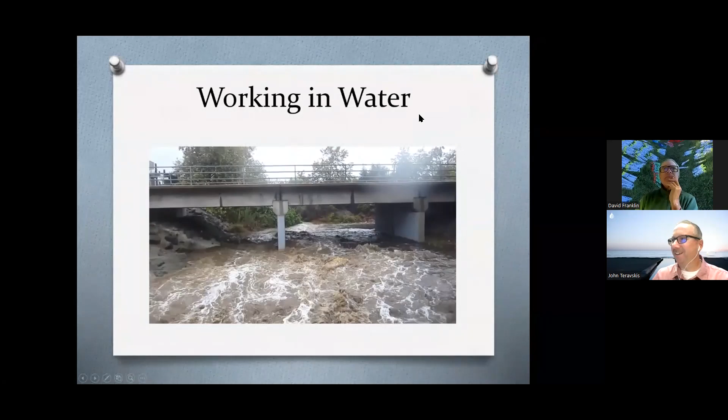All right, well, it's time to start, and I am really excited about this workshop, Working in Water. And I have my good friend, David Franklin, who I owe a lot of my professional background to. David was one of my original trainers, and I've enjoyed working with him and collaborating on all sorts of projects through the years and different trainings that we've done together.

So David is, I think, probably the most prolific trainer of record in the state. He trains a lot of people, very knowledgeable, and has quite an extensive background. So I want to give David as much time as possible. So David, why don't you tell us a little bit about yourself, your company, and then let's jump into it. Sure, John. Thanks for having me again this year.

Well, you know, mostly now I do training for the industrial and construction permit and other related classes, but I do try to keep my feet on the ground and help construction sites and industrial facilities. I'm a big proponent of learning from each other. Being a trainer of record means that we hear other people's information and expertise, and so then we get to turn around and share it with other people.

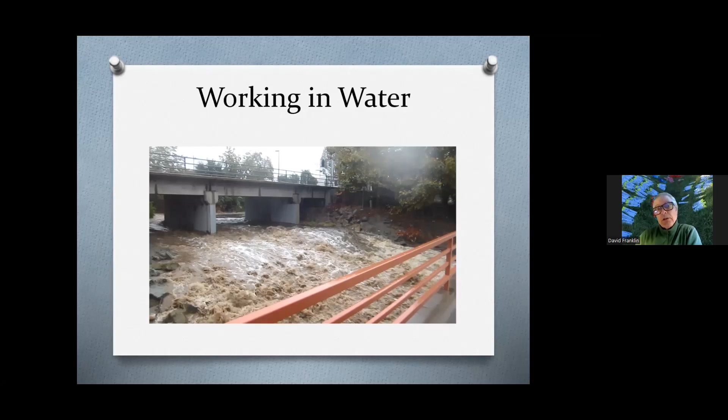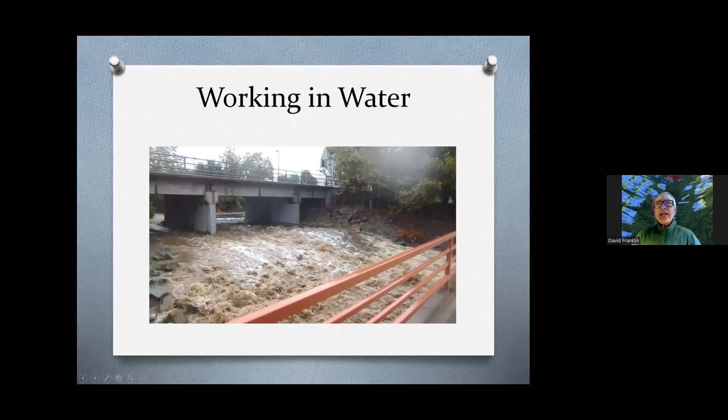So this little movie that I was showing a minute ago, I don't know if anybody noticed, but we had like tires floating away and straw bales. And so the question is, where did the straw bales come from, right? Well, earlier that day, the straw bales and the plastic sheeting and the gravel bags were in the channel, along with some equipment. And there's a different movie I have that shows the oil pan from underneath that excavator floating away. So why does this kind of problem happen where straw bales are washing away?

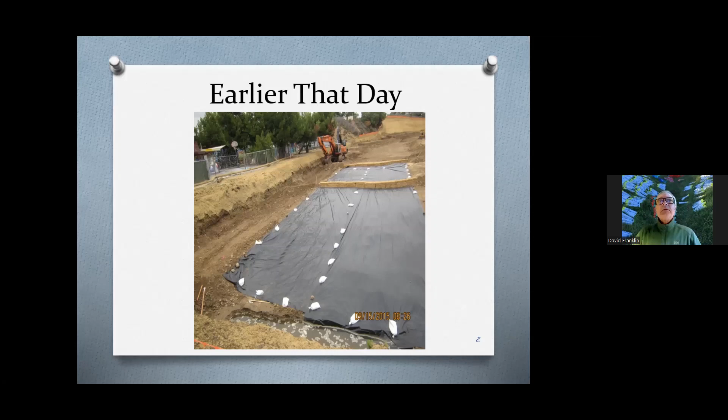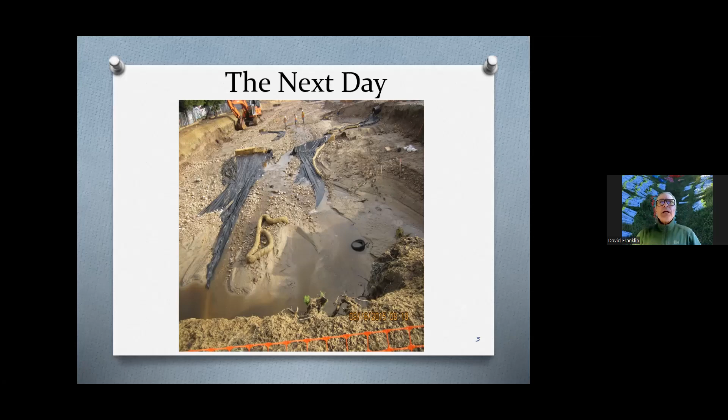It was actually in the stormwater plan to have straw bales and plastic sheeting and gravel bags as a temporary solution in the stream. And I like to ask the question, what is the first BMP in the book? The first BMP is scheduling, planning, not being in the water body at the wrong time. And yet there are different forces that make this happen time and time again, right? So, that was later in the day or the next day, everything washed away. But what contributed to that happening?

Planning and design. We mentioned that the first BMP in the book is planning. And so the civil engineers pretty much have it dialed in for the final condition, don't they? They know how to build it so it doesn't wash away. And so one of the first ideas I like to share is that the temporary mimics the permanent. That means that if we're looking for a temporary sediment control, it should mimic the permanent sediment control a lot of times. We'll explore that idea a little bit more up ahead.

And there are various permits required to be in the stream, right? Well, in this job, anytime we work in or impact directly the water body, we're supposed to get permission from the regional board through the 401 certification process. And when the applicant fills out the 401 application, the regional board has the ability to comment, or it might time out. I think it's 30 days. And if the regional board has not commented, well, then the operator can proceed.

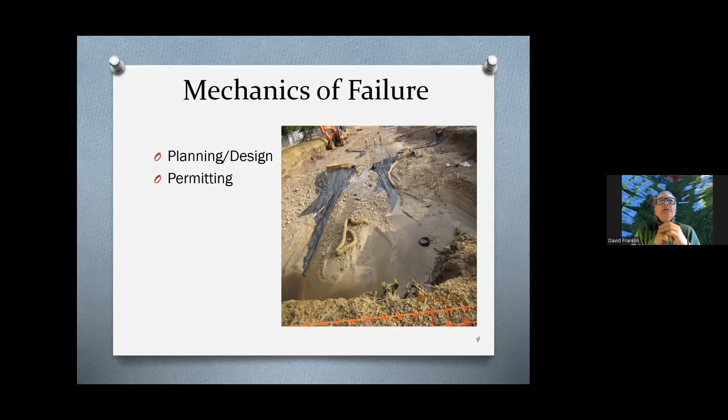So in this project, no comment was given back to the operator. And so that's part of the failure. We need to have limitations from the regulators issuing the permits.

Now, sometimes the contract will say contractor must proceed within 60 days or 30 days of award. So now that's a problem, because maybe it's not the ideal time for the environment. And suddenly we are desiring to make an impact on the stream bank when it's not ideal. The rains are coming. So there's a conflict there.

Funding. On this job, the accessibility to the grant funds was running out. Only so many months ahead could the contractor get those funds. So now we're chasing the funds instead of protecting the environment. So that's another conflict.

And the SWPPP, the BMPs, it's hard to know what kind of temporary solution could deal with the river coming from the rains. And so this is what they had in the SWPPP, and so the contractor did it, but it wasn't the right solution, right? It's hard to know what a legitimate solution is.

And at the end of the presentation, I have a little discussion on, other than not being in there at the wrong time, what might be something you could do before the job is finished. Because that's what we as SWPPP managers must always keep our eye on. How do we survive before the finished condition? That's our question.

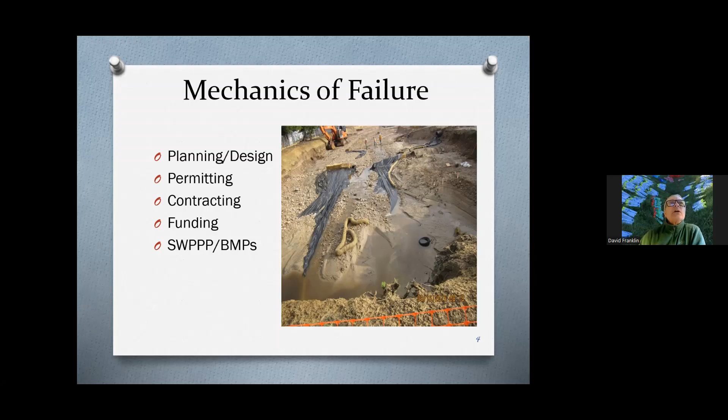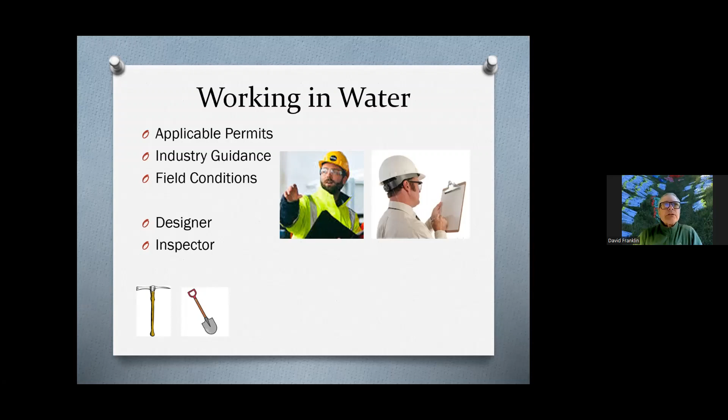So applicable permits, we've got industry guidance, and we've got the reality of our empirical assessment of the site conditions. So maybe there's input from the designer, the inspector, or the enforcer. And of course, there's no better enforcer than Dirty Harry.

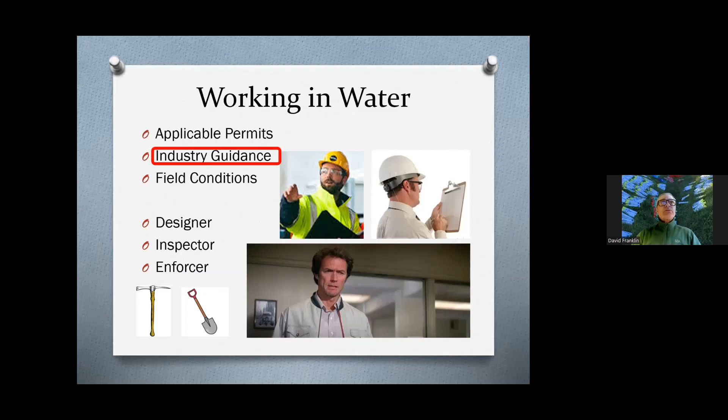Let's look at some industry guidance. So the categories of BMPs, I always like to point out that in our industry, we have a bad habit of going to the toolbox and pulling out a crescent wrench to paint the kitchen, because we're not isolating the different categories of BMPs, like planning and scheduling is the first one, and

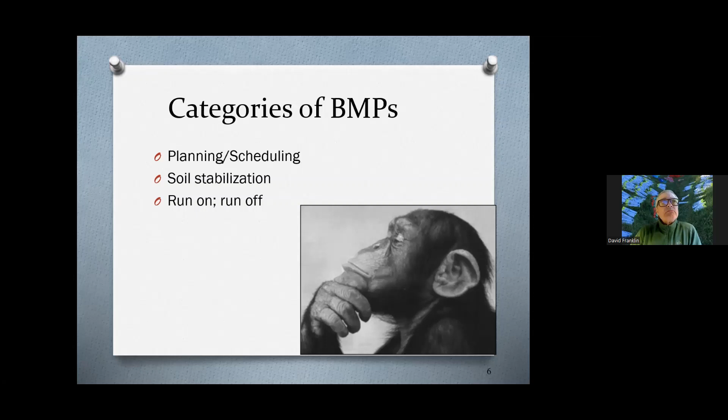soil stabilization, concentrated flow, run-on, runoff, sediment control, housekeeping, and non-storm water. So in our construction permit, more or less, those are the main categories. But what's missing? All thinking chimps want to know what's missing. And there's a component called working in water. And where would we ever find that component, that BMP? There's a hidden little secret.

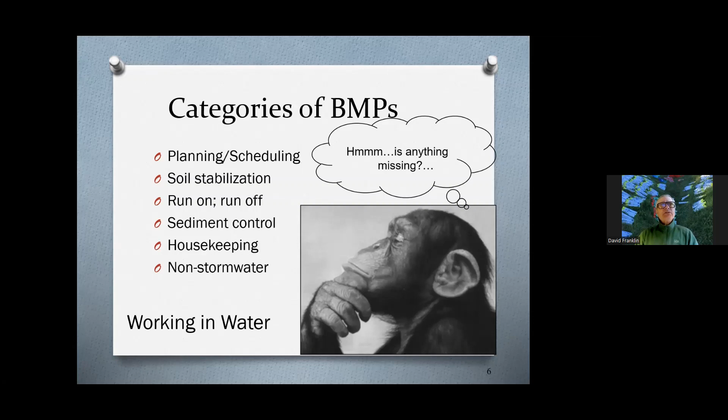So we have these BMP manuals. This is one from the olden days. Everybody see how that's from the olden days? I don't see that one floating around anymore. But this is the Caltrans table of contents for the temporary soil stabilization, which sometimes we call erosion control, sometimes we call raindrop protection. Protection from the raindrops is SS-3 through SS-8.

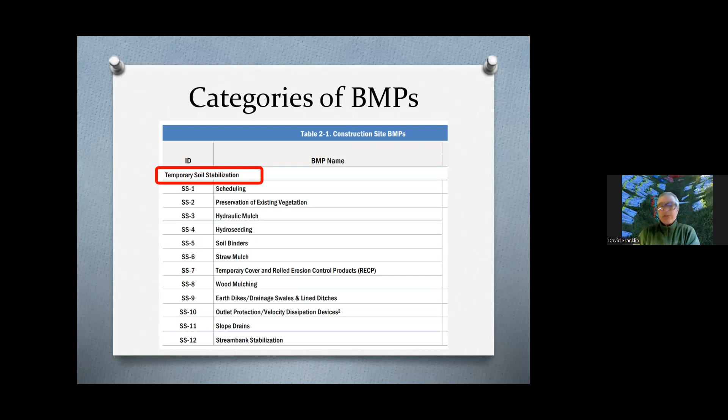And then SS-9, 10, and 11, those are for the concentrated flow condition, right? We want to divert water, convey water, release water in a concentrated form. That's 9, 10, and 11. But here's the little secret, everybody. You know what SS-12 is about? It's how to do the first 11 when you're in the water body. That's the hidden BMP. How to do the first 11 when you are working in or near the water.

And time after time, we will see jobs that are in or near the water, and they don't pick stream bank stabilization, which is guidance on how to be there. That's kind of odd, isn't it? That's where we get good information.

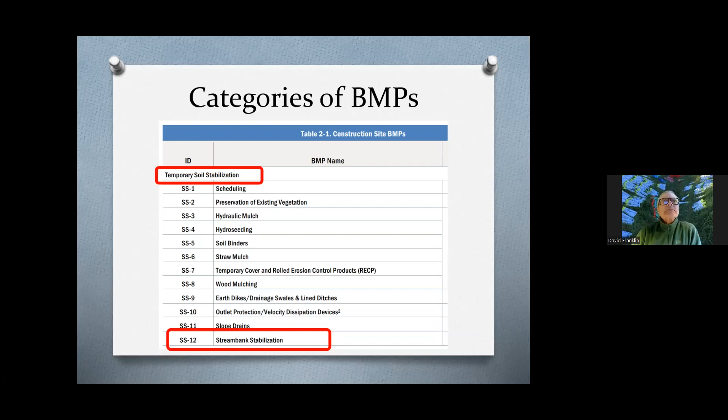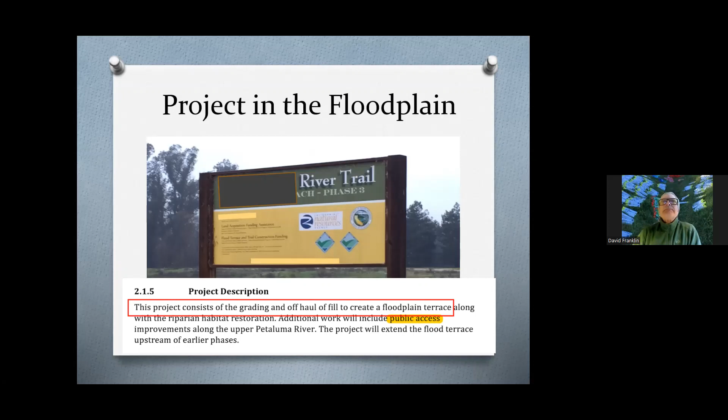So this project here, the scope of work was hauling off illegally dumped dirt to create floodplain capacity. The floodplain terrace needed capacity. And the other part of the work was to make a public access trail. Okay. So the final design called for fiber rolls in the floodplain.

And I am concerned that over the years, we've become obsessed with fiber rolls, linear barriers of any kind, but largely fiber rolls because they're lightweight, inexpensive, and we can throw them everywhere. I like a fiber roll as much as the next erosion control junkie, but they don't apply everywhere.

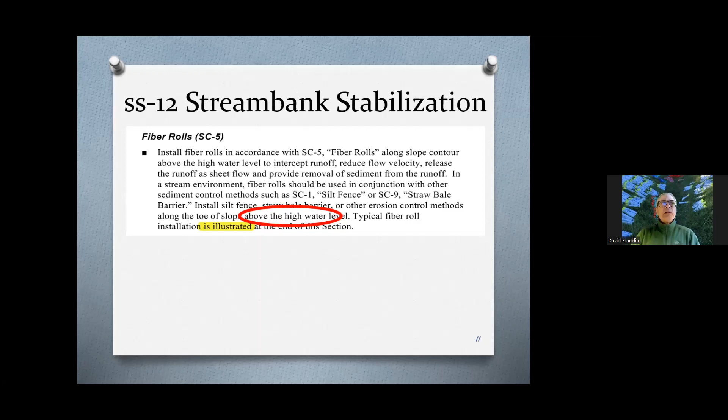And you know, the book that nobody reads, that BMP manual that nobody reads, what does it say? It says, put fiber rolls above the high water level, not in the water. It says, don't put them in the flow, the concentrated flow. And what is the high water level? Well, it says here, often corresponds to the edge of the stream side terrace. So put them above the floodplain terrace, not in the floodplain.

And remember, when we look at the BMP manual, it's good industry guidance. We might disagree and ignore, for good cause, certain things. And we might also be much more strict than the general industry guidance. We can go either way based on our professional experience, judgment.

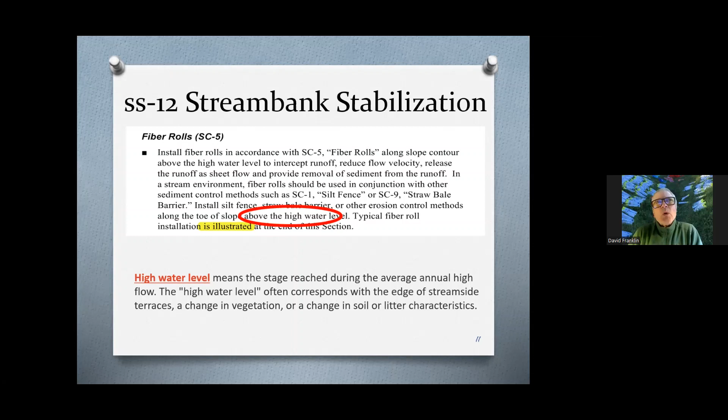So this job called for fiber rolls as the final condition, and I'm going to ask everybody to make a note that if you're writing or reviewing a stormwater plan, let us not be confused by the final design. We can acknowledge the final design, but when we write or review a SWPPP, we want to know that the SWPPP's focus is the temporary solution during construction.

Don't be distracted. Don't be quoting. Don't be pointing to the final design. We want to know about it, and we will build it, but it's not how we survive before the final design. That's where our focus is.

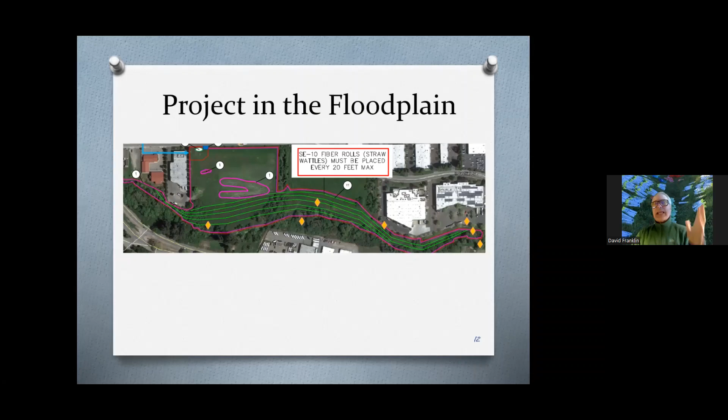So on a very short job in the late summer, early fall, that's supposed to be done before the rains come, how did that happen? How did the willows catch the fiber rolls that shouldn't have been in the floodplain? They shouldn't have been in the floodplain for several reasons. But again, this job got delayed. It was supposed to be done in August and September, but it got delayed.

Now, at some point, we have to say, maybe we need to wait till next year. But does the owner want to do that? Do you really want to apply for another permit next year or extend it? There's a lot of resistance to saying, let's not do the job. And so as a result, the willow trees caught some anacondas, the runaway fiber rolls.

You see, they came back later on due to the addiction to fiber rolls and said, I bet we probably have to have a fiber roll there because everybody wants fiber rolls. So they put the method in that doesn't wash away. And what method is that? If we're ever putting a fiber roll for good cause, like a check dam, maybe in a swale, we're supposed to use the tie down method. You see, those stakes are not through the heart like the vampire. They're outside of the fiber roll with ropes going from notch to notch. And now it cannot wash away. And it didn't. But it has no value.

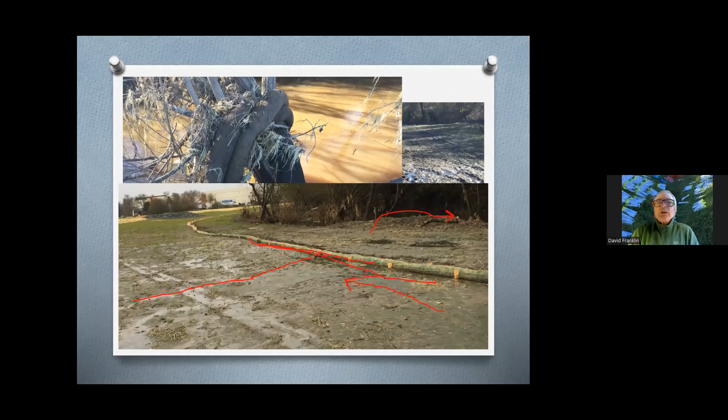Well, that coir log might be designed for preventing or reducing scour from that bouncing thalweg, that low point, that energy point bouncing around in the stream. So the coir log might be a temporary buffer against impact. Or it might be a place to pound in some willow stakes and other vegetation so that it's able to be established and deeply rooted with some help from the coir log. So we have different objectives with these different practices, right?

You can see here that the straw washed away. Off to the left, you can see there's a bunch of straw. You see that? And here's the straw in the trees. Why was there straw in the floodplain? Well, when I was walking the job, I said, what's the right thing, David? And I said, coconut netting. Coconut netting is rated for shear stress and velocity and scour prevention and wave action. Coconut netting would have been good.

And so I walked up to the beginning of the floodplain and I looked on the ground and there was a roll of coconut netting staked in place, stapled in place very nicely. And I said, why did they just put one roll down? And I thought about it and I postulated that somebody said, that's expensive and slow. We have sprinklers. It hasn't rained in years. And so maybe they thought they would get the seed sprouted under the straw with the sprinklers, and it would all be okay. And it might have been okay, but the rains came hard and heavy that year and early.

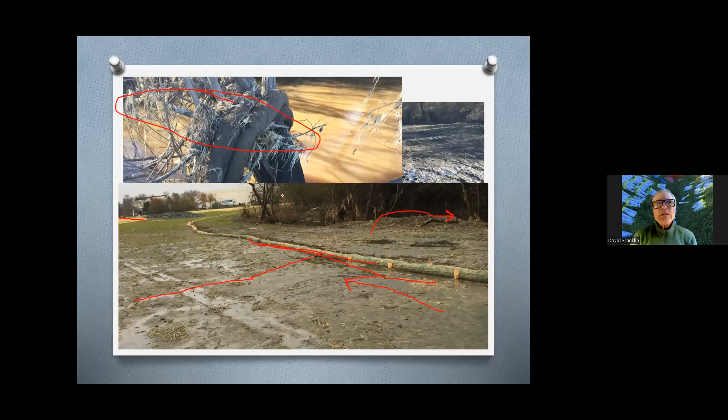And they were delayed into December. So the straw washed away, the fiber rolls washed away, and neither of those had to be there. Just coconut netting holding down the seeds would have helped the seeds establish and not wash away.

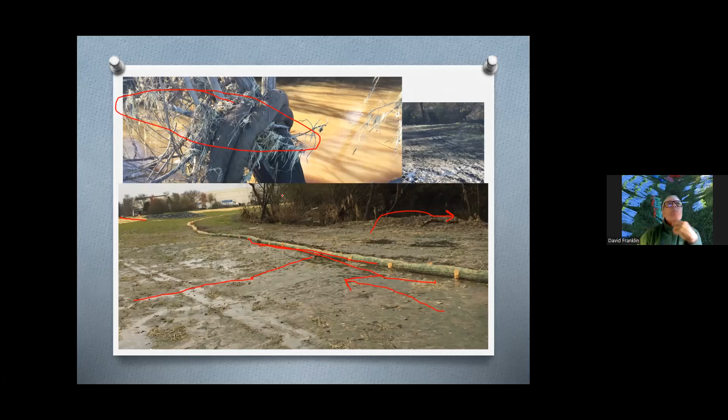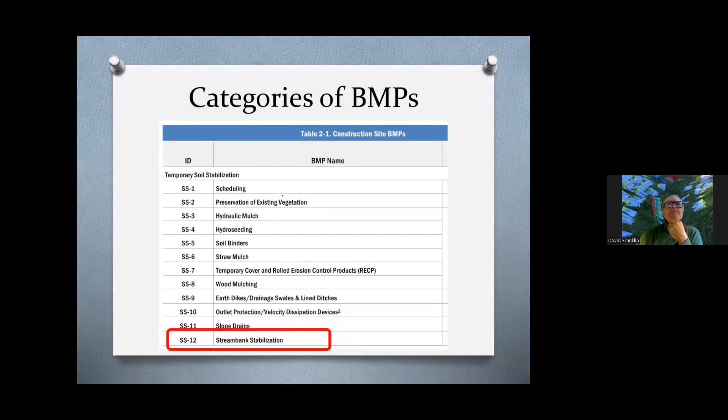Stream bank stabilization. You know, I mentioned briefly the 401 application, and it's under the Clean Water Act, Section 303(d), that the impaired water bodies are listed, at least narratively, and then eventually TMDLs are established numerically. And so the guidance for a qualified SWPPP developer is that they should check the regional board requirements.

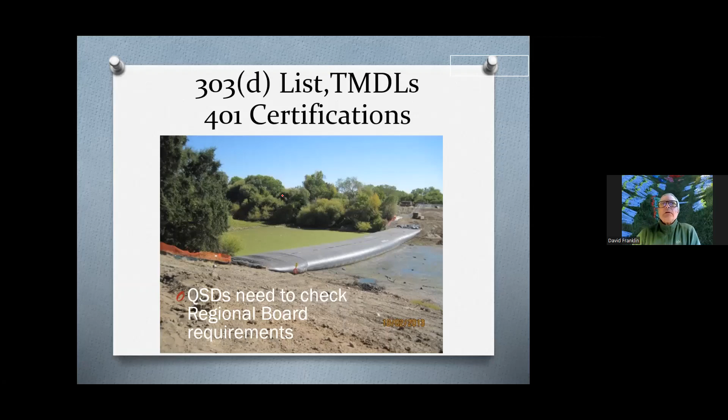And the 401 requirements are like this. They're issued by the regional boards to certify or deny the construction activity proposed, impacting waters of the state. And when there's an Army Corps job, of course, that will trigger application for the 401 from the regional board. And the regional board will translate that 401 application into a waste discharge requirement, giving guidance on the proposed activity.

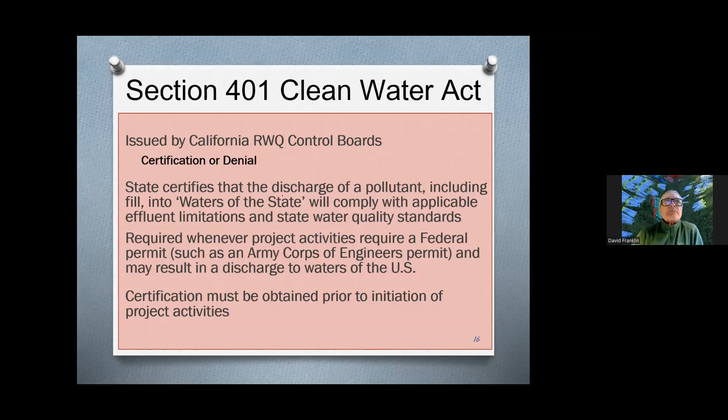And so the basin plan, you know, in the Central Valley, if you want to build some homes, well, maybe you bought some land from a farmer, and the creek next to your proposed homes is impaired for diazinon because farmers used to use diazinon and it's now outlawed. And so that creek would be called impaired for diazinon if you were to look in the basin plan.

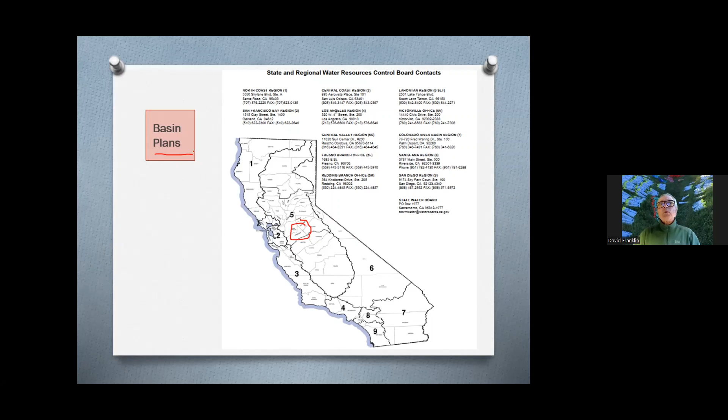So if you're going to build homes impacting that creek, the regional board would probably say, you're going to push dirt around that's probably filled with diazinon residue in the winter storms. We want you to sample for diazinon in your runoff so you're not adding more to the creek. So that's how the regional boards have the ability to represent the local concern for the water bodies.

The water bodies have to be inventoried under the Clean Water Act; all states must inventory their water bodies and see what good they are. Like down in Newport Beach, what good is Newport Beach? Well, swimming. The children like to swim there. And what is the impairment for swimming? Bacteria. So where's all that bacteria coming from? We have to find out. We have to recognize it's not good for swimming.

But if you're up in the Central Valley, what good is the water there? It might be agricultural irrigation. So if there's bacteria in the irrigation water, does the lettuce care? No, the lettuce doesn't care. We might care if we're going to eat the lettuce, but it doesn't hurt agricultural irrigation. What hurts agricultural irrigation? Salinity does. Does the lettuce want to have salty water? No. So we have to say, where's the salt coming from and what are we going to do about it?

So you see, the regional boards have a very difficult job to know their basin, know what good the water is, know what's hurting it, and how much hurt is too much hurt. And so they do have to be involved when we impact a water body.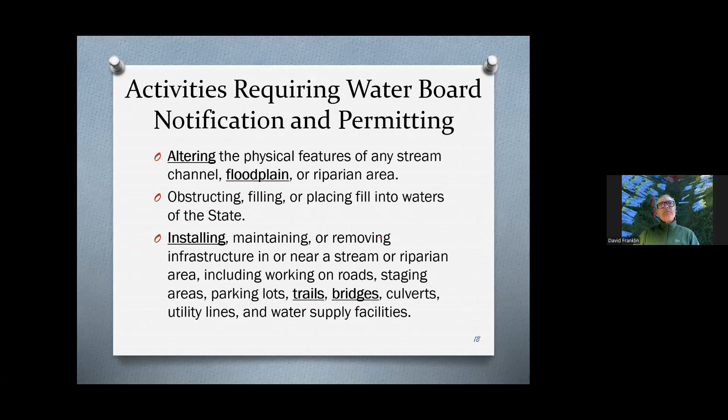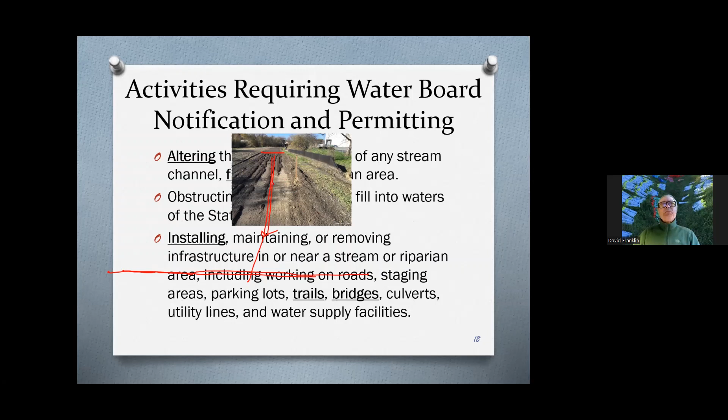But further back, it was calmer, even during the dewatering of the receding flood. But it's hard to know where that break point would be, isn't it? And so nature told the designers, I guess you should use concrete up to this point, beyond which it'll not erode. So we do need empirical follow-up to what our calculations proposed.

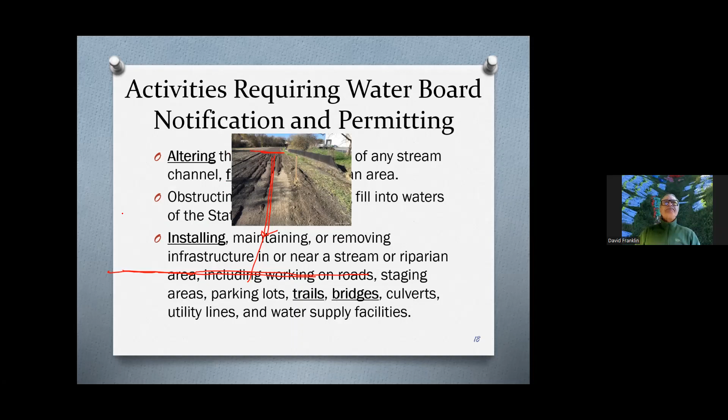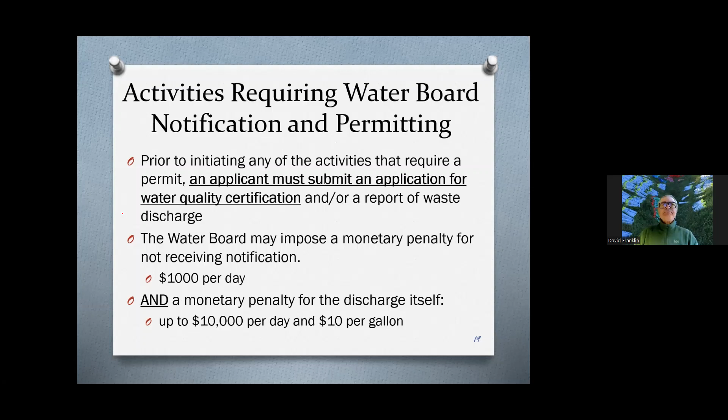So in the San Francisco Bay, they have their water quality objectives, and they can be narrative or numerical. And a narrative is a general description prior to an actual number being discovered or required for compliance.

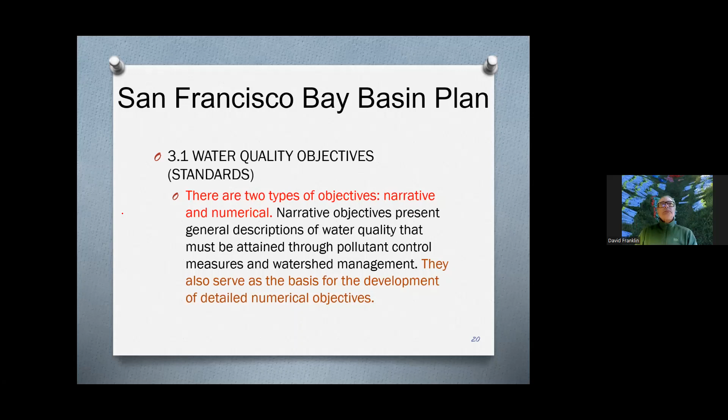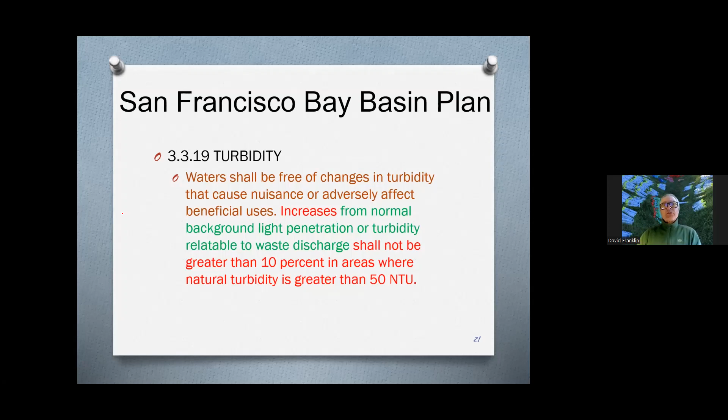And this job, the SWPPP, said that the regional board requirements had been considered in writing the SWPPP. I couldn't find evidence anywhere for this job that there was a 401 certification applied for, commented on, issued. But the SWPPP still said the regional board requirements were considered.

So if we're ever writing or reviewing a SWPPP, I think we should all agree that it's not enough to say the regional board requirements were considered. I think we need to say something more specific. We need to acknowledge proactively that it's been determined by this QSD that nothing is required. All right. Don't just leave that generic language in the SWPPP. Let's comment on what the regional board's basin plan says. This is an impaired water body that's supposed to be sampled.

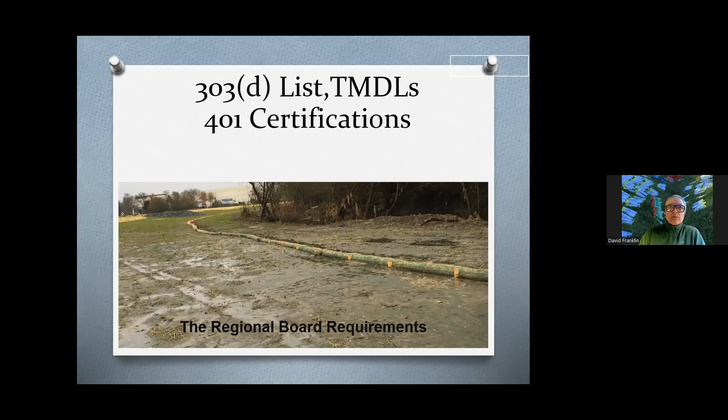You know, the annual report for this project, it said there were 8 qualifying storm events, and none of them were sampled. Now, we don't know all the details. We don't know why they didn't sample, but they did have to explain it. And what did they say in the annual report? They said, all the stormwater infiltrated into the ground and no discharge ever occurred.

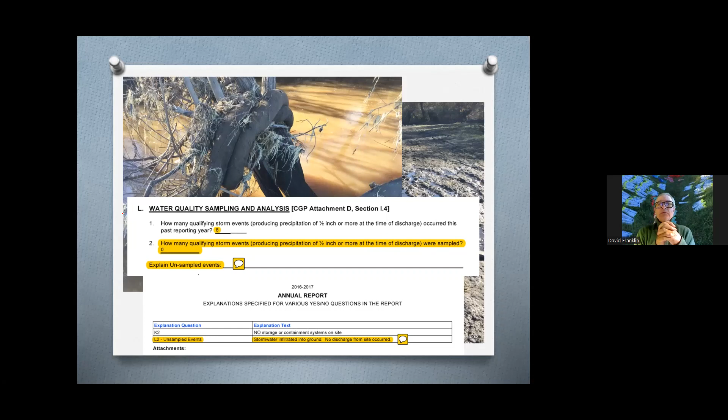When does runoff occur? When the ground is saturated. When does flooding occur? When the ground is saturated. So the flooded condition, washing away fiber rolls, is a pretty strong indication that there was discharge.

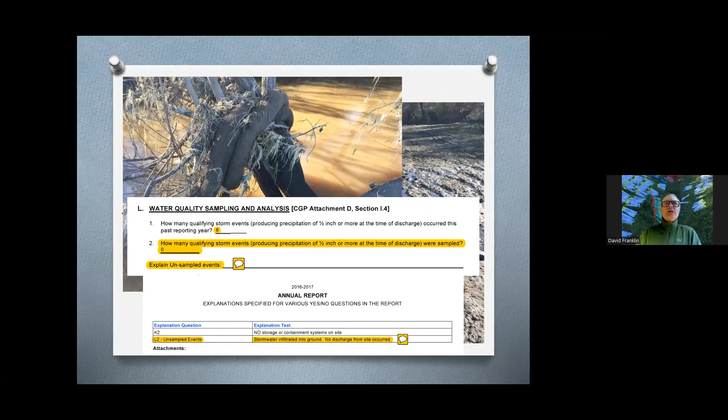So it's important that the different laws and agencies in charge control our impacts to the water bodies that belong to everybody. The local people now, under the Clean Water Act, have permission to comment and protect the waters. The federal government, oftentimes under the 404 Army Corps application, and regional boards under the 401, and Fish and Wildlife under the 1602 Streambed Alteration Agreement.

So there are different players when we're working in water. Different kinds of inspectors, sampling technician, and of course everybody wants to be Dirty Harry.

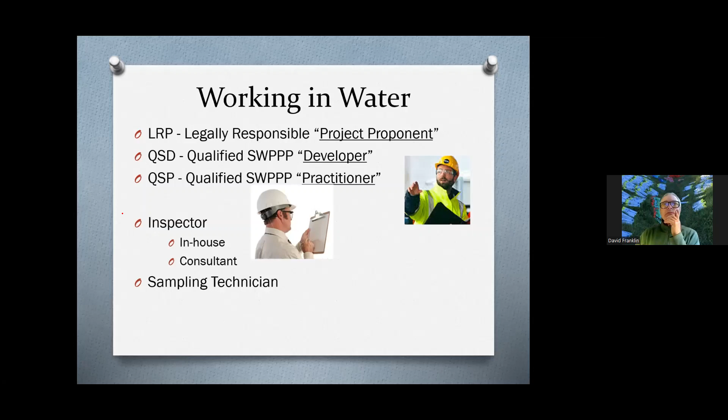What if you divert the stream so that you can remove sediments from behind a dam? You know, there are many dams in California and many operators generating energy from the dam. And you know what dams live for? There's just one thing a dam lives for, and that is to build up sediment behind it. That's right. The only purpose for a dam is to build up sediment behind it. Well, you know, that's what happens.

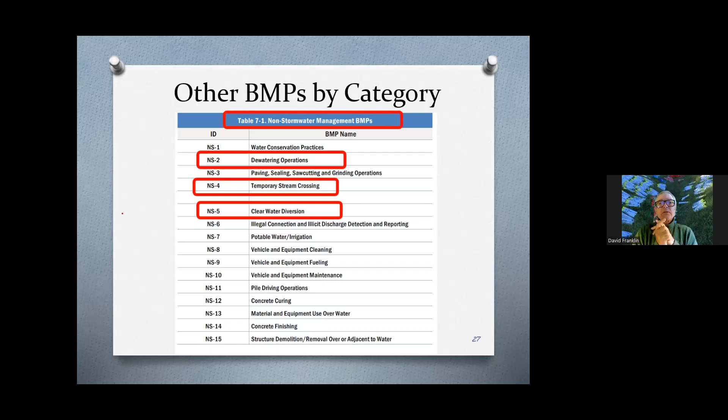And so people who operate dams and energy, they have a never-ending job of diverting the stream at the low flow time of year, and then dewatering the impounded water behind the dam so that they can remove sediments. And sometimes they have to buy property so that they can make mountains with the sediment they took from behind the dam. It's called mountain building from dam sediments. That's the scope of construction sometimes.

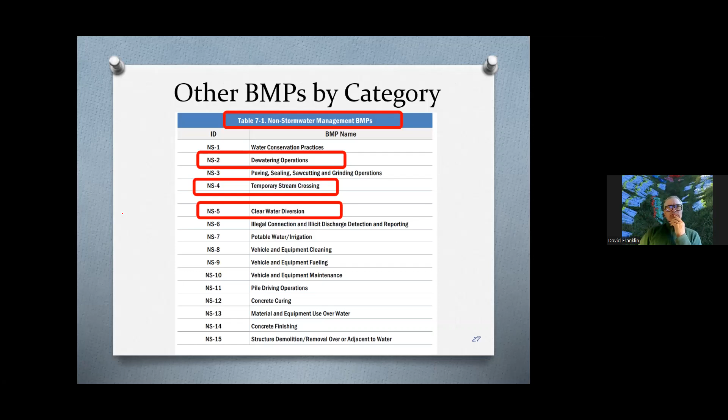So, temporary stream crossing. There was a job years ago down on the southern border where they were doing a big energy job. And I would just like to mention that we've been, of course, seeing billions of dollars being spent in California on massive energy projects, a lot of times out in the desert. So I think we have a big red flag happening on a lot of these energy projects where they're far from scrutiny. They are out in the monsoon rains of the summer. They have a lot of fugitive dust issues.

And so I think the regulators need to up the game on some of these projects out there that are just not getting a lot of environmental protection, and they're focusing on building those energy projects, right? So it is a big problem we're having in the state that's, I don't think, being discussed very much.

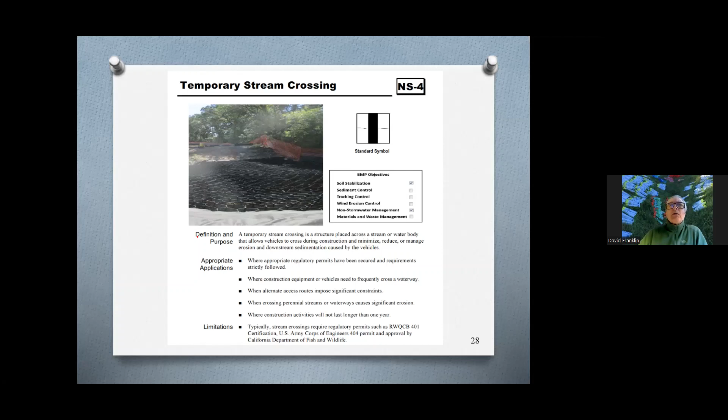But so years ago, there was a project that was doing windmills, wind turbines. And what they really needed on day one was a low stream crossing, a temporary stream crossing, low water crossing, which is a BMP. Now, this is that project, and we have 6 feet erosion times 1 foot deep for 3,000 feet. So we could figure out how many tons of dirt ended up on the neighbor's septic field. But more importantly, we want to know, how did this happen? Why did hundreds of tons end up on the neighbor's property?

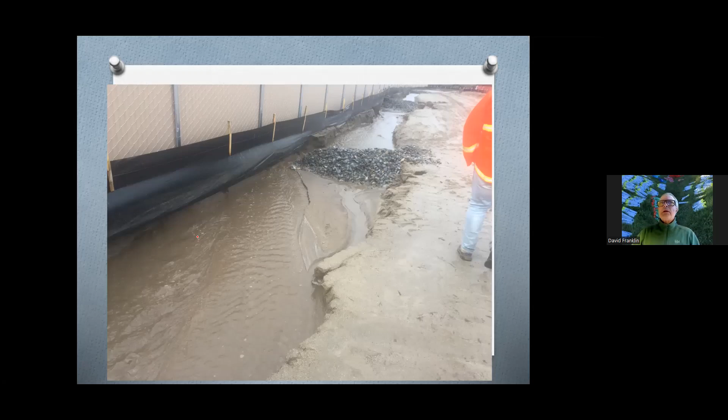And here it is. You see, we have to stop thinking that silt fence is supposed to go around the whole job. We have to stop. This is silt fence blocking an ephemeral stream. This is not the place for silt fence. And admittedly, there's a problem here because you've got biological concerns and you're not supposed to go outside of the footprint and disturb into this other area here. So you couldn't even be wrapping the silt fence up the ephemeral stream, I guess, because you're supposed to stay close to the disturbed footprint of the job.

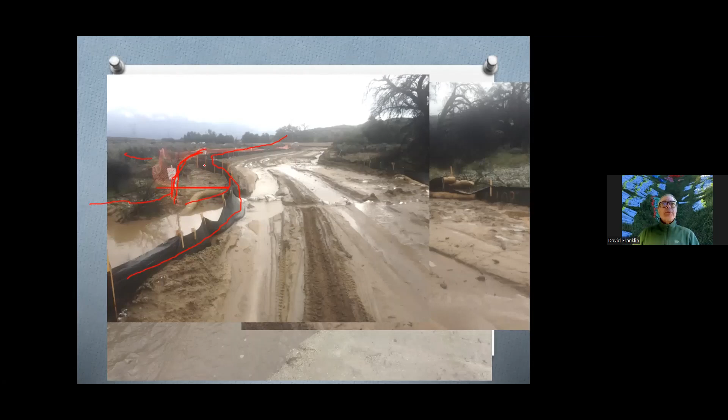But nevertheless, this is not a place to stop the stream. And we just saw the proof of it. So this silt fence ended up diverting water to the neighbor's property. This is where we want that low water crossing, a temporary stream crossing. Some kind of ability for the vehicles to drive through this low point and not raise up sediment. And the BMP for temporary stream crossing gives us many options. So this is an example of using the wrong BMP, the wrong category. They put a sediment control where we need a low water crossing.

The water should have permission to go across the job and keep moving. Should have been the first thing done. And the permits issued should have said so. A lot of times you cannot find a 404 permit. We need to have an industry agreement now that the SWPPP will include all other pertinent permits.

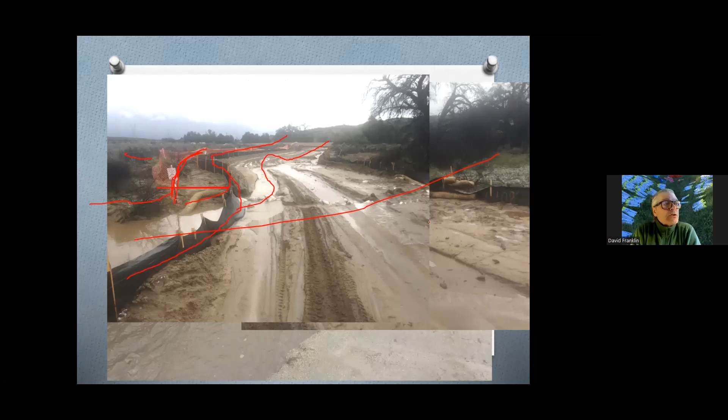Before the current permit for construction came out, the old permit and SWPPP templates had a section called Other Plans and Permits and References. And I'm not seeing such a strong demand anymore in our paperwork process that insists on having a copy of the other permits issued. For this job, you had to submit a Freedom of Information Act application. And it shouldn't be that way. We need the water board to start to demand that other permits are part of the permit registration process and must be available to the public.

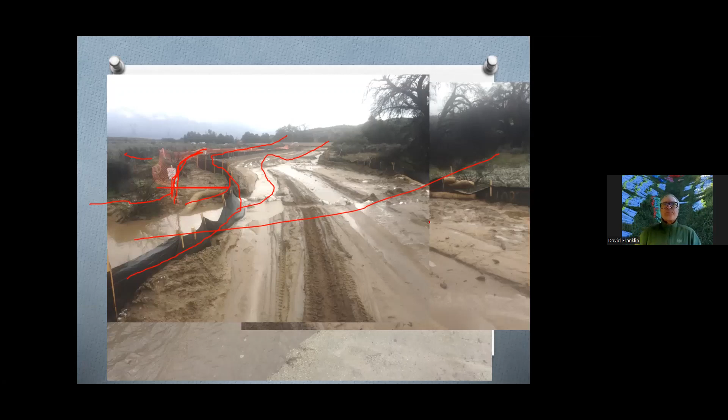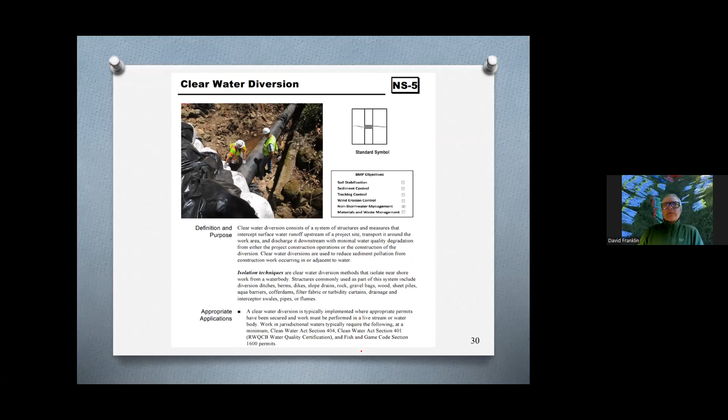So the Clear Water Diversion BMP is many pages, and it's a very important topic because we're supposed to go into a stream, stop the stream, divert the stream, not create turbidity when we release the stream further below, maybe behind the dam, so that we can remove sediments from the dam. So it's many different techniques for doing it well. And there's a dam that's going to always need sediment removed.

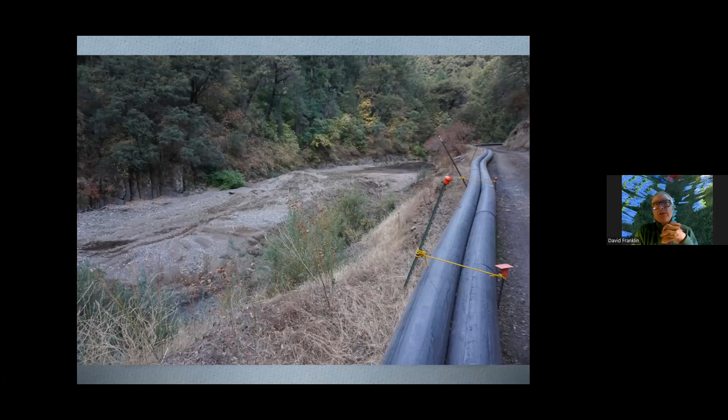Now, on this project, the specs, the contract bidding documents said that the contractor must submit a diversion plan. And so the problem with what happened was, for all the contractor knew, their plan for diversion was a list of equipment, pumps of this manufacturer size and pipes welded together to divert the water. It was an equipment and material list. Okay, so that's not a plan, is it? No, it's not a plan to just list equipment.

The plan has to talk about how to stop the low flow, how to put the pump in the water without raising sediments, how to pump the water without sucking up sediments, how to break apart these pipes that we see when the job is done. Because you know what these pipes have in them? A lot of water. And so the pipes go up and down the undulating topography, and you have to cut them open to put them on a truck in smaller pieces and carry them away. But the act of cutting them open means water comes gushing out and creates a gully of sediment down to the water body, which by then is full of clear water.

So that's a very important component of the plan. How do we break apart the pipes? We have to talk about dewatering behind the dam. The stream's already been diverted. Now we're dewatering behind the dam. And we want to have a floating pump that doesn't leak oil and a way to boom that oil and remove it if it's discharging from the pump.

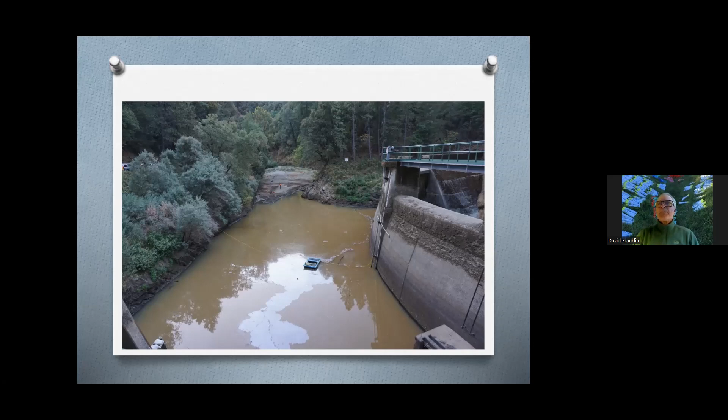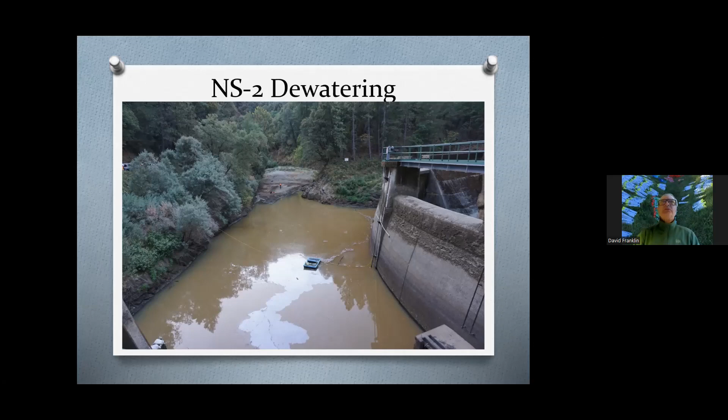Sometimes we'll see an oily sheen on the water, and it's just from the vegetation. But this is dewatering the impoundment, which is different than diverting the stream, which is a clear water diversion. And so you can see that the nuisance water is constantly being pumped out at a low rate while the sediments have been removed.

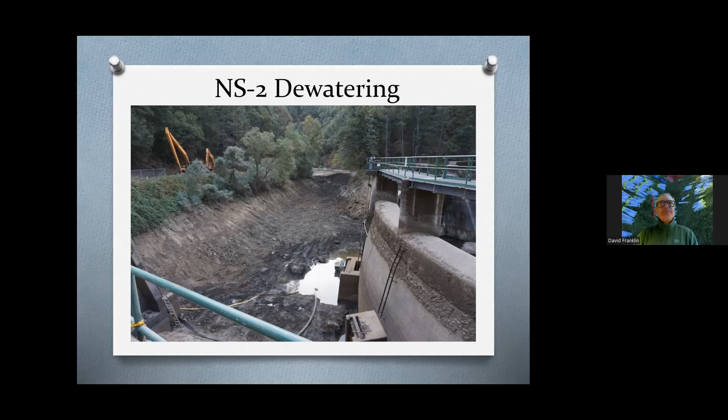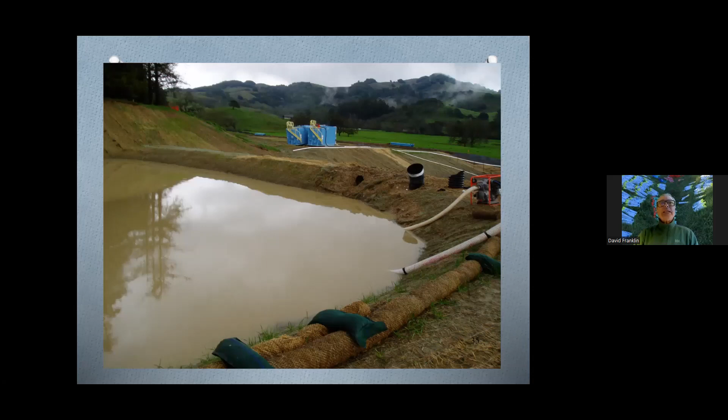Well, here's a construction site where they are sucking mud off the bottom because they're not using a float. The crew on this job was simply told to sleep in their car through the night and the storm. Make sure you hear the trash pump working. But they were never given training on noticing that the sprinklers on the neighbor's wetland area were discharging mud being sucked from the bottom of the pond. And so now we have turbidity on the neighbor's property.

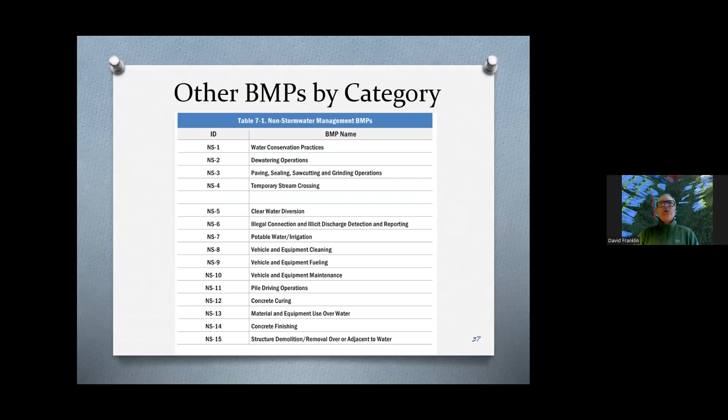And pile driving. A lot of times, where are we pile driving? Well, oftentimes along the stream bank, right? So when it comes to pile driving, what do all pile driving hydraulic hoses live for? I mean, what purpose in life does a hydraulic hose have other than busting? That's what they live for, right? They want to bust. And so when we look at the BMP called pile driving operations, what does it say?

It says, inspect the operations and the hoses every day. You're supposed to look at the hoses every day and ask them if they want to bust today or not. If they look frayed, well, if they're leaking, you're supposed to take action, right?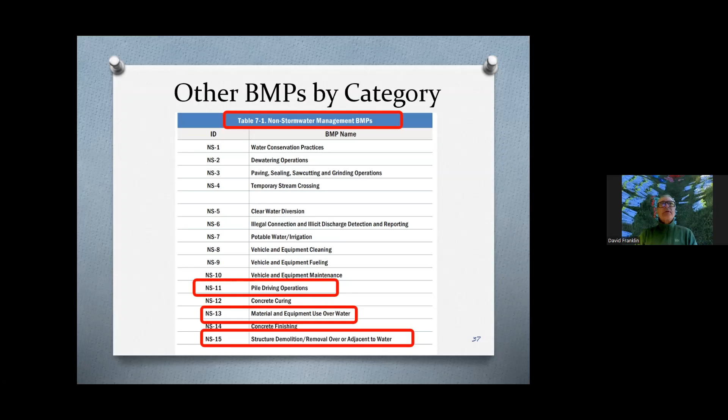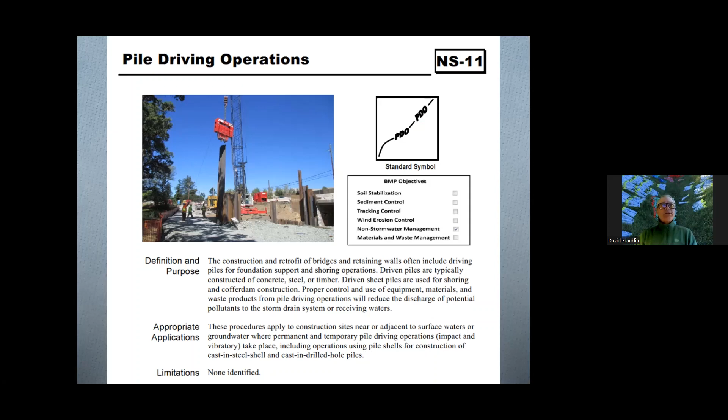Material and equipment use over water. And demolition and removing structures over water. So those are other working in water related BMPs, right? In the non-stormwater category. So pile driving, we mentioned that they need to be inspected daily. But there's a lot of guidance in there. Working over water,

well, on this job, the vendor showed up a day early. Which vendor? The porta potty vendor. They showed up a day early before the job started, and they put the porta potty where it was convenient for them, right next to the stream bank. So when we look at the BMP working near or over water, it'll say things like 300 feet from the stream bank, stage your equipment, stage your porta potty.

Normally in our BMP manual, we have the 50-foot setback, but for in and near water, we can up the game to like 300 feet. This gives us a buffer, a chance to respond. And I'd add, you probably want a pallet of sandbags and some containment in case it gets blown over.

On this job, there were actually bears. And what do bears live for? They live for what high school teenage boys live for, knocking over porta potties. That's what bears live for too. And so you probably want some kind of containment in place before the bears show up, and have it 300 feet away.

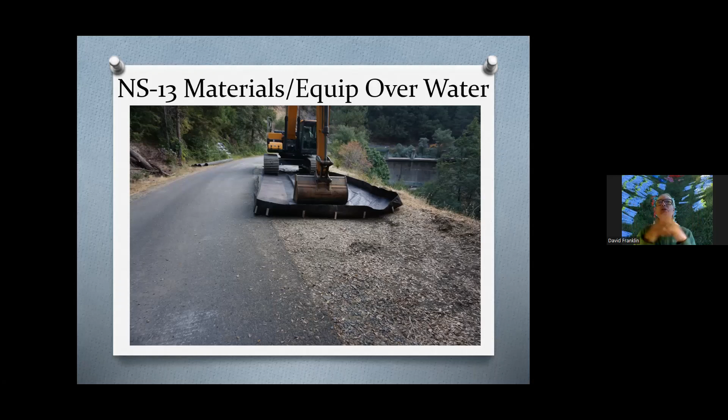And a heavy duty... A lot of our industry, and this is a big area that we still need to solve, the idea of non-storm water protections versus housekeeping protections. On this job, the equipment was in really good shape. Nothing dripped ever. Has anybody ever heard of that? What does the equipment live for? Equipment lives to drip. And yet, on this job, none of the equipment dripped. So it's very nice that they had the heavy duty containments that you can drive on and it doesn't rip them.

But here's the issue. You know what we still get to have in construction sites? We still get to have messy, greasy equipment in the rain. There's no prohibition against Zerk fittings, sloppily greased. Well, we don't want to be excessively sloppily greased, but greased joints in the rain still get to exist.

So the real threat is the raindrops hitting dirty equipment, not well-maintained equipment dripping on the ground. Because, you know, when the rain rains on this equipment, the greasy fittings and all that, we're going to have a big old pool of greasy water from the equipment, not from leaks. So we still haven't solved that.

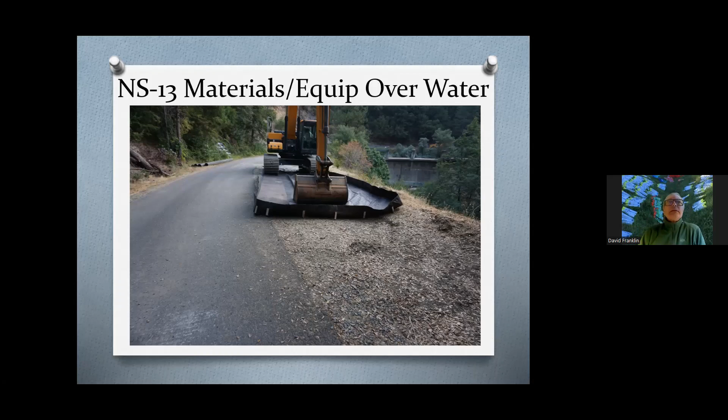Well, sure, the answer is you're supposed to pump that greasy water out and dispose of it properly, but I don't like the fact that we're generating it in the first place. It's almost like we should have more focus on tarping the equipment than putting a pan under it. But that's for the days ahead in our industry. And we have these rules that you're supposed to put a pan under the equipment on the bridge if the motor's turned off immediately.

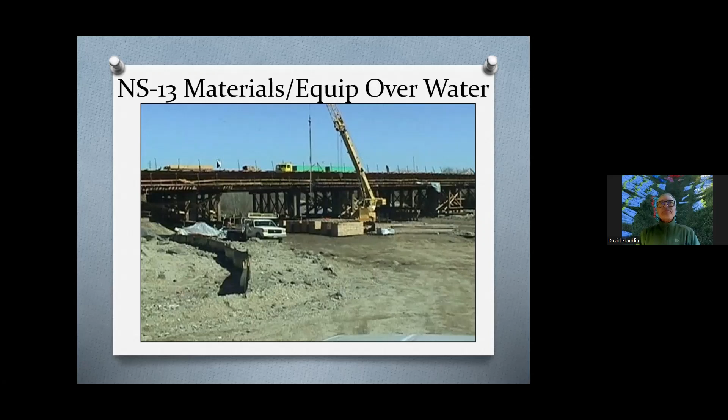And I'm hoping one day that we'll stop hydroseeding the rocks in the ditch. The rocks don't sprout and grow the seeds very well. So we need to have a lot more control over the erosion control contractors who time and time again are spraying where they have no need to spray. Remember, erosion control contractors prefer to do cannon work from a truck 80 feet away. They don't want to pull hoses.

And our job is to say to the erosion control contractor, look, I know you want to do cannon work and don't want to bring 2 more people. I'm going to give you 2 of my laborers and they'll drag your hoses because I want you to drag hoses and stop spraying my river. So we have to work with them proactively so they don't show up with two people doing cannon work in a 60-mile-an-hour high-speed drive-by hydroseeding application.

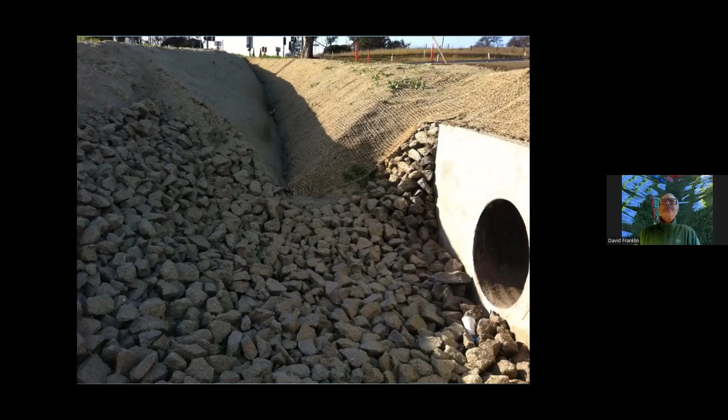Demolition over water. We're always demolishing. You know, I remember when we did the Caltrans trainings, we had this one woman who worked on the Richmond Bridge, and she said, over an 18-year period, I observed Caltrans going from direct sandblasting discharge of the lead-based paint into the bay to complete shrouded protection and containment of everything. And she was there as a witness to it, that Caltrans solved the problem over years. And what an expense, what an effort.

And yet, we also had somebody in class one time years ago who said, as a child, my parents wouldn't let me play in the Merced River. But today, I bring my grandchildren there, and there's no rebar and concrete and glass, and it doesn't stink anymore. So we've made a difference.

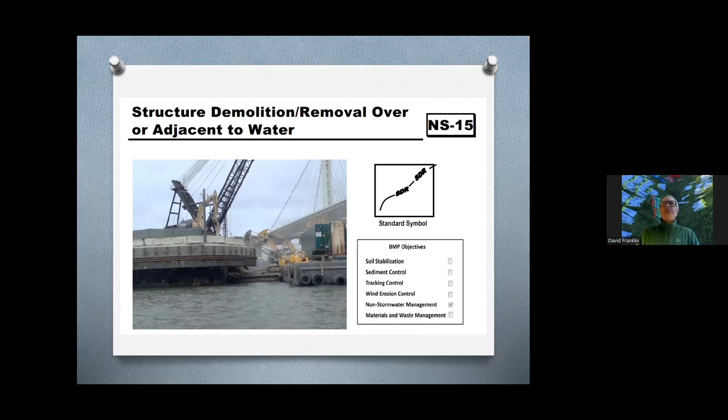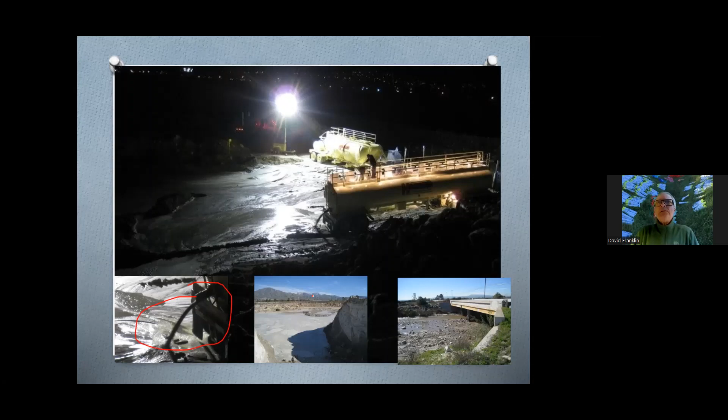There's supposed to be a plan when you're working in the water on how to handle your waste. Now, as I understand it, the Caltrans spec standard provisions still require that a manifest of where the waste is going is required. So that's a pretty good standard, isn't it? So we as permit writers or SWPPP developers could demand that all waste leaving have a manifest, a submittal declaring where that last 10 truckloads of concrete waste went to.

I've seen it go to illegal batch plants on a contractor's farmland, and now we've got concrete dust blowing into the lungs of the bicyclists driving by. It's an industrial activity.

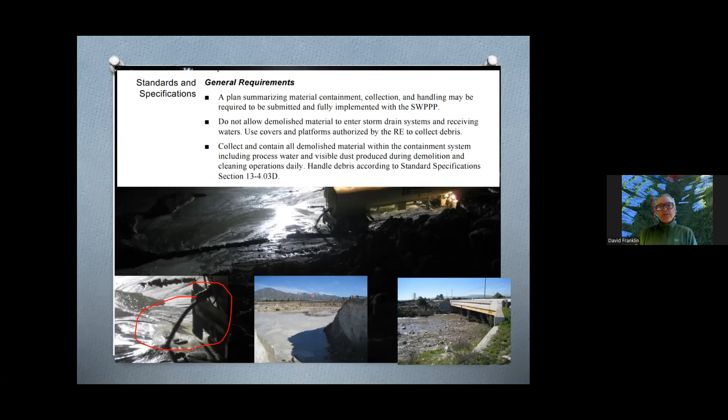We have a few more minutes left. John, if you want to jump in, or if there are any questions to answer. Yeah, I have, David, a few more slides, but go ahead. We have some questions. There's been some pretty good dialogue going on in the chat too. So I don't know if you want to scroll through some of that.

First off, you mentioned scheduling, and scheduling is becoming harder and harder, as we've seen in the last few years. I mean, we had the huge rain event last October. We had the super early, significant rain event 2 weeks ago. We've had these unprecedented monsoons all summer long in SoCal and Death Valley and Markleeville and places where we get huge mud flows from wildfires. So just sticking to the traditional normal dry weather schedule isn't so reliable anymore.

That's right. New challenges, I guess, that we're facing because of climate change and weather pattern changes. So that's been one of the dialogues we've been seeing this morning. Another is just about the incorporation of the environmental permits into the SWPPPs. A very good point was made. They're very voluminous, there's a lot of paper, a lot of pages. Maybe including them in the SWPPPs might not be practicable. Okay. I have a comment on that, John.

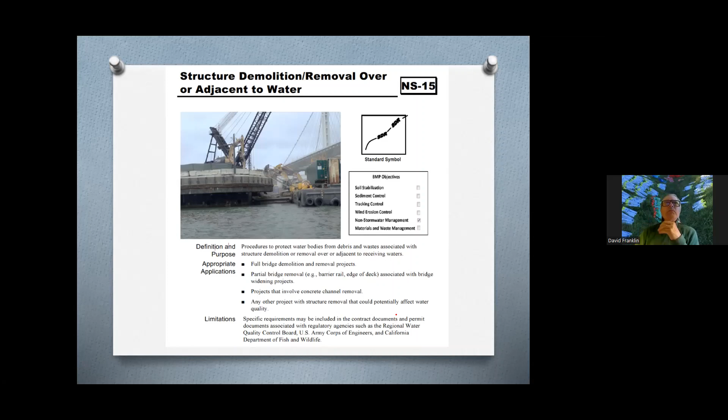Well, we only have 1 minute left, so I want to wrap this up. But I appreciate you, David, and your teaching style and the great insights you've given me. Of course, I've walked away with more Franklinisms. I always get Franklinisms. I've added to my list the hidden BMP, erosion control junkies. Let's see, the book no one ever reads. Of course, I've heard that before. Anacondas in the Willows. I love it. What do dams and hoses and bears and equipment live for? Thank you for adding to my list.